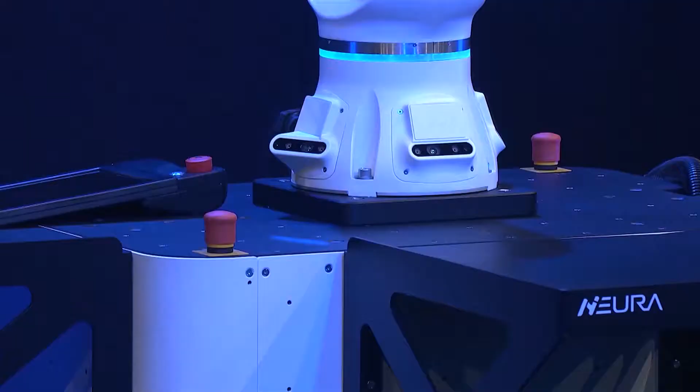That's actually the same as we humans do. So with full speed and full reach, she has 12 kilogram payload. With a little bit less speed, she has 14 kg payload. And the same, you can even give her a little bit more payload, and she will just tell you, hey, my reach changed, I have a little bit less reach.

So let's go to the reach. She has 1.4 meter reach. That's actually excellent, because most of the work in an industrial environment is mostly like emptying gitter boxes. Until now, most cobots are too short for that. MAiRA has the ability because of 7 axes and also having the reach.

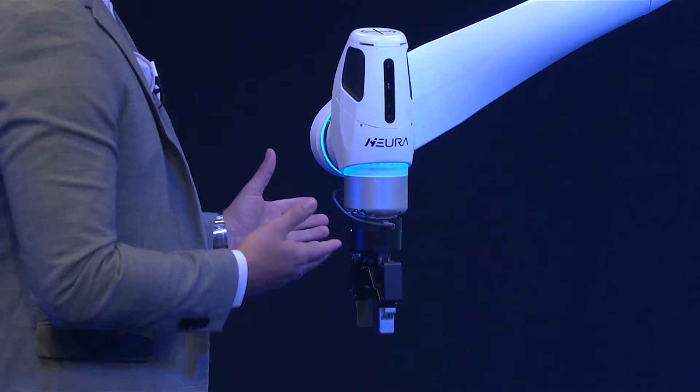So we also have a few different versions. Here you see the medium version MAiRA. We also have a shorter version which has just a reach of 1 meter, but a payload of 18 kilograms. The same, we also have a very long version which is up to 1.6 meters and has just a payload of 10 kg.

Also, one big thing I always hear from customers, from people talking about cobots - mostly they are too slow. This is why we made the robot assistant MAiRA, which is closer to industrial robots. It means it also has the capability to be super fast through the sensors, through the new motor concept we have. So MAiRA has a speed of 4.5 meters per second.

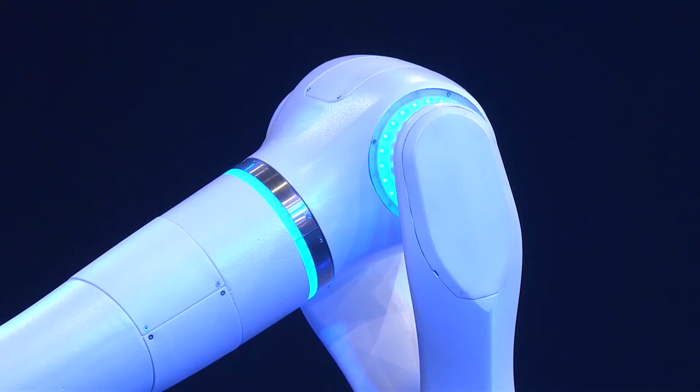So you see a lot of LEDs. It looks beautiful - I would say it would even fit next to your Christmas tree. But this is not why we made all these LEDs inside. The LEDs are there to actually show you the status of every axis on its own. It means if one of these axes turns red or orange, you know something is going to happen soon, or already happened if red.

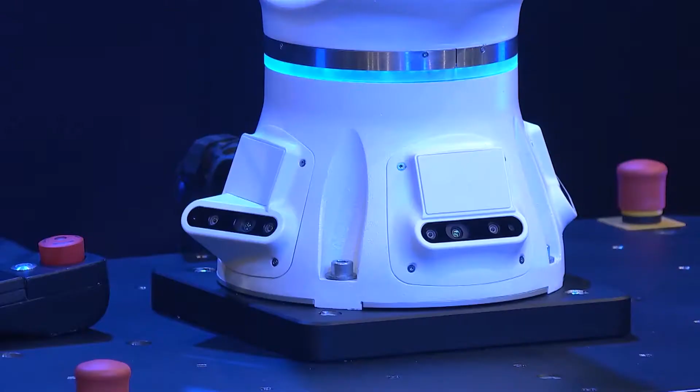Not just the double bearing concept makes our robot super stiff and unique. We also have a honeycomb structure in all these parts, and a very special alloy which all our engineers developed. This makes our robot super stiff, able to be fast and sensitive.

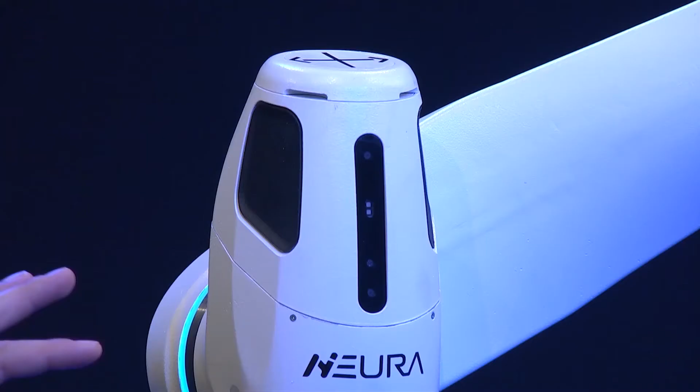I think everybody knows the picture of most cobots, or the videos, or maybe even in real life - there's mostly cables around it. That's because there are mostly grippers which need different IOs or different interfaces on the TCP. With MAiRA, this ends, because from now on all the connectors you need are here on the tool center point. We have GPIOs like Modbus and even IO-Link. We've also thought a little farther, because in the future I hope there are more intelligent grippers coming - this is why we also integrated EtherCAT and CAN bus. Also very special is 3x air. This robot has everything inside that you need for every gripper existing in this world.

So what else is needed to have a robot integrated into your system, or maybe also in your environment? This is the safety of the robot. It's super important - to work side by side with humans, you need safety. To work maybe in a medical field by operating, you need safety. And that's why we have here a very special safety structure.

Every joint on its own has its own safety function, all you need to be safe. Also, we have a safe bus going through the whole robot, which sends all the safe values to our safe master, where we calculate the safe environment, maybe safe Cartesian safety. And we have something which is super unique, I think you've never heard that - we call it the SHD function, the safe human detection. This enables us to have a fast cobot in the environment.

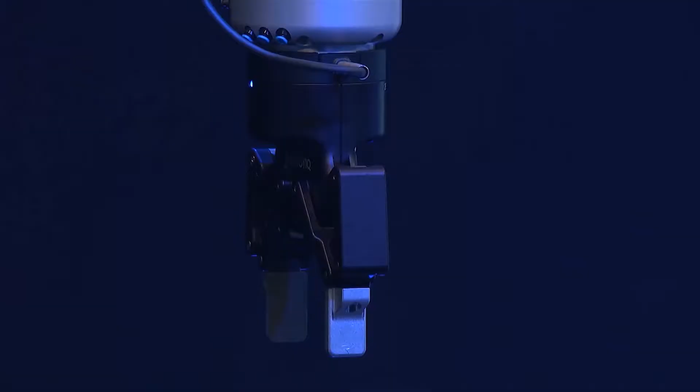So everything you saw here, maybe you don't need a camera - you're able to just leave it out. So it means this MAiRA structure will always be the same. The only modular part is actually the head. So you can just leave the camera away.

So let's come to the best part, actually the fun part, I would say - really starting to interact with a cognitive robot. So here you will see what's the biggest advantage of being cognitive.

So all these senses are there to perceive the environment, but also to interact with you in person. Every person in the world has a different kind of communication, a different way of communicating. The same goes for how every person likes to program this robot, in a different way.

And for that we created 6 different ways, and even more by combining them. First we have teaching by grabbing the robot and just moving it to some position to teach. There's also record functions where you can record complicated movements, or record movements by guiding something.

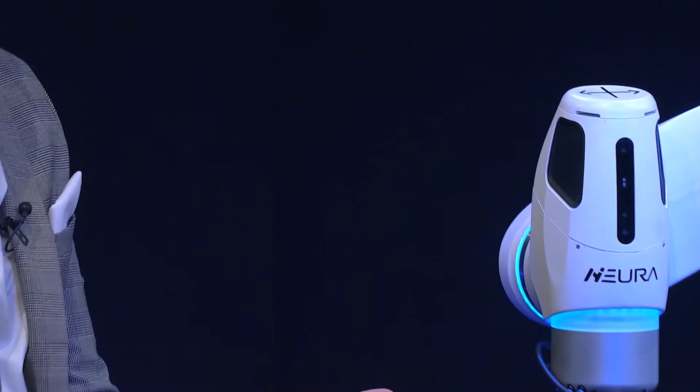So there's also recording of forces by grabbing the robot, moving in some direction, and recording the forces coming from the side here. There's also action recording, meaning everything you're doing gets recorded, and that's great.

But there's also, I think, the most fun part, which is voice. Because we are humans, we like to interact by talking to each other. And that's the same with MAiRA. MAiRA loves when I talk to her.

You will see later. There's also gestures - like the Italians, I think they like this one the most - by showing something, she understands.

And also there is a way, which I think the young guys like maybe, by just a tablet. I mean, even my daughter knows how to program this robot, I'm very sure. I will show you.

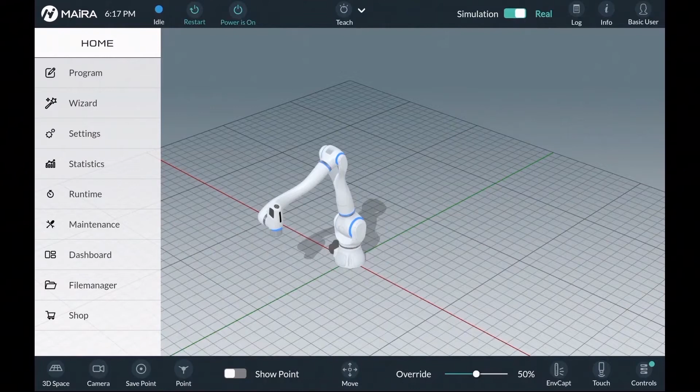This is the tablet with the graphical user interface. So let's just start the robot. Now you see the digital twin of the robot. I hope you see it now.

So here you can just go there and actually touch any axis. From now on you can just move the robot in each direction which you want, or you go over to use other moving functions like zero gravity. So I turn the robot on.

From now on I can actually move the robot wherever I want. Here you can also record these actions, what you want to do. But I don't have much time, so I'll go very fast through all of them.

So how to program over the tree editor. Here you just go grab the gripper you are using, and now you can do everything over drag and drop. You can have any action, just drag it there and start it. But I want to show you some different actions too.

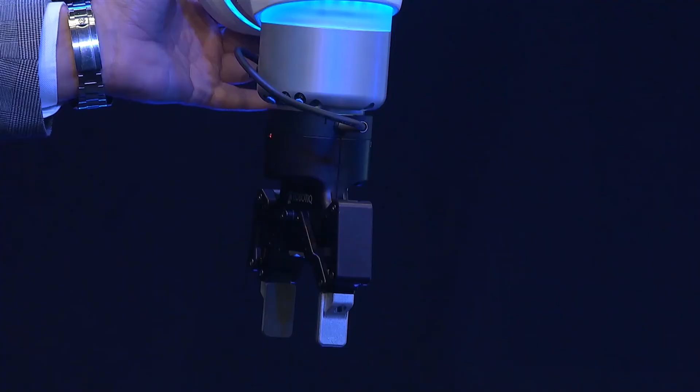One I showed you very shortly is the zero gravity, where you can have the whole robot in zero gravity and move it in any direction you want. But there are also some disadvantages, because this robot still has some rotating axes, so it's very difficult to get linear motion, like along a straight road.

This is why we implemented something we call the skin. It's a 6-DOF touch skin, which I can activate here. From now on, over this touch skin, you can move the whole robot very precisely in any direction, but now linear. So it means you can move in X, Y, Z, and you even have some turning directions. Everything is very simple over this skin, and also very precise.

The other big advantage is that you can divide the forces. With zero gravity, it's very difficult to see where the force is coming from - is it from down there, or from the robot? This is why, to be precise in force recording, we decided to put this sensor inside, having a force torque sensor always integrated at the TCP.

For example, in a grinding application, I think nobody has ever seen something like that. When you're taking the robot, you can actually put in the number of pressure, like forces, and the robot will just apply this kind of force which we want to apply.

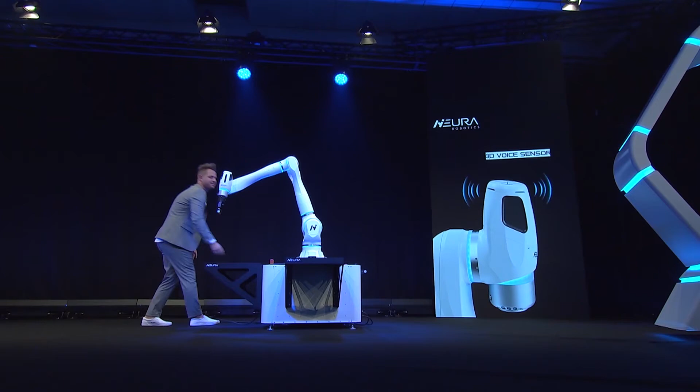Hey MAiRA. Hi David, what can I do for you? How are you first? You know what, I feel shy in front of all these cameras. Me too actually, but I'm getting more and more comfortable. What can I do for you? Please use 'Hey MAiRA' before each command. So now everything I say she hears, so I have to be careful.

Hey MAiRA. Hi, what can I do? Free drive mode. Do you mean free drive mode? Yes. I'm in free drive mode now. So now you can take the whole robot and move it in any direction.

And stop. You can also give her other commands, like: Hey MAiRA. Hi, what can I do? Move joint. Do you mean move joint? Yes. Move joint to which point? 28. Do you mean 28? Yes. Move joint to point 28. Here you see, you can command her with everything.

And that's amazing, that's something I love the most. You can even turn some axes if you want. You can do many things, and this is just like how we're used to communicating with humans, and that's also how you can communicate with our robot.

Like I told you, we can program the whole robot by voice. So when I say, hey MAiRA - hi, what can I do? - Record actions. Do you mean record actions? Yes. I am in free drive mode and recording your actions now.

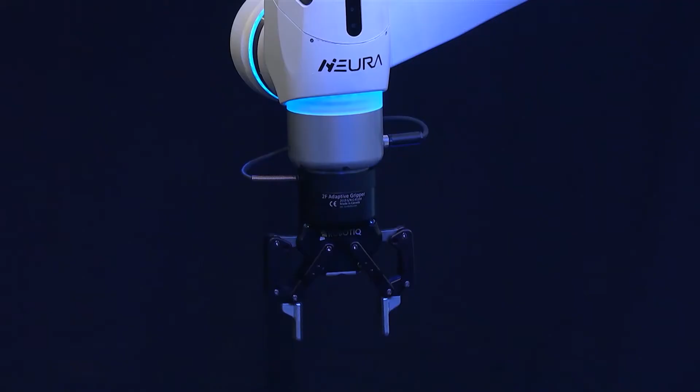So now you see exactly what I was moving, and she just recorded everything. Even now you will see she will open and close the grippers like I did. That's actually the new way of programming. This is an interaction of different kinds of disciplines.

One is by hand guiding, one is by voice, and the other is even over the safety touch skin. So now we will come to the other part, which is also fun - this is the vision part. Most of you know that there are cobots, and you just integrate a vision system somewhere on some corner or whatever. The very big difficulty is actually to integrate them, to make them cooperate together. This issue you will not have with MAiRA, because MAiRA has all the vision sensors and everything inside the robot.

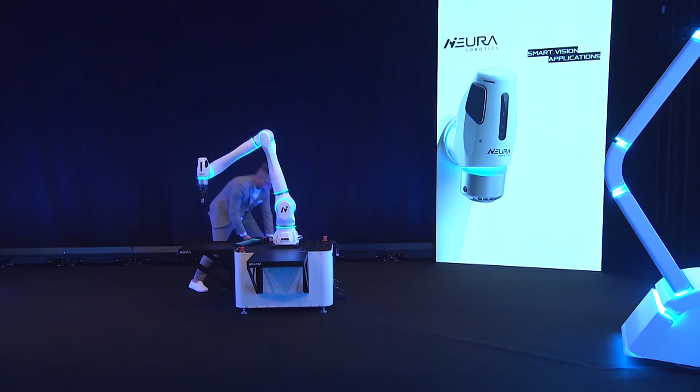Here you see the camera, and I will show you some examples. So now I place some parts here. There are many different kinds of vision applications you can do - object detection, identification, and also pose estimation to know where it is and how to grasp it. Smart grasping and smart assembling tasks are possible with this vision.

In this case, what I would like to show you is that we also have machine learning algorithms running on our system. We have integrated GPU and CPU, which is very strong, to make machine learning directly on the robot.

I start with a simple task which I call program scan. Here I just run the whole thing to show you how easy it is to scan the environment and then learn out of it.

So now you will see the robot is going to move. This movement, he captures everything he sees, and you will see it also in the GUI. I hope you also see the GUI at this time right now.

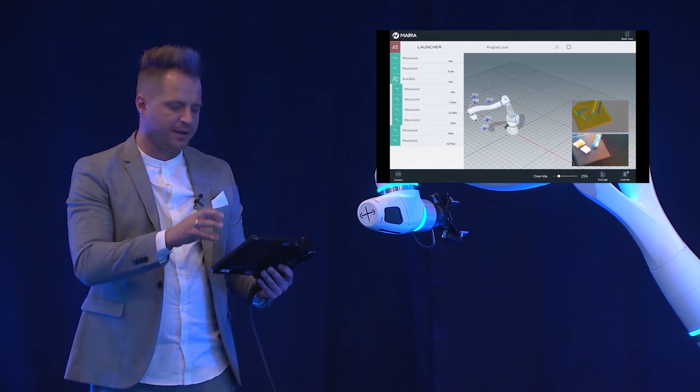Here you see, on one hand, the point cloud, which is the depth information the robot gets, and also for the later learning process. And you see the 2D images saved as well, because we have two kinds - one is 2D color images, and the other is point cloud.

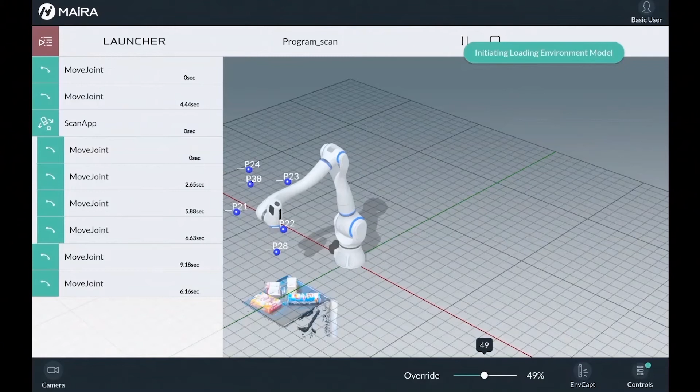So now we are loading and processing the whole part. It will take some time, but then we are able to learn out of it. At this time he goes into a different position, and afterward you will see that you get this - what we saw in the real environment translated to the virtual environment. So here on the GUI you now see this environment, these components, also in our virtual environment.

So now we could disconnect this tablet and make simulations in the virtual environment. So now we saw one thing, but I'll show you something even cooler - we call it pick objects, which we learned.

So right now we have two different kinds of picking objects. One is unknown parts - I can put any parts on this table, and MAiRA will actually take every part away that's there. It will always find a way to do it. But there's also another method - selective grasping. That's what I'm now turning on.

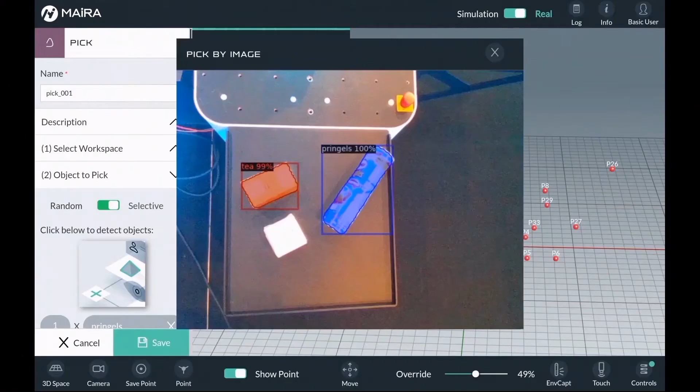Now you see she actually recognized two of the parts she learned before. So it means right now I can click on one of them - I like chips right now. And in this moment you can also choose how many of these components you need. Can you imagine, for industrial use, you have many kinds of components in a box - you first put them there, learn them quickly, and then grab them out of the box.

Or also, like the future of any supermarket - we're all having a smartphone, we have an app where we just type in what kind of components, or food, or groceries we want. And in this moment, MAiRA is going through the store by vision and picking all these groceries and putting them in a basket. So you don't waste time - you're just going and grabbing the whole basket for you.

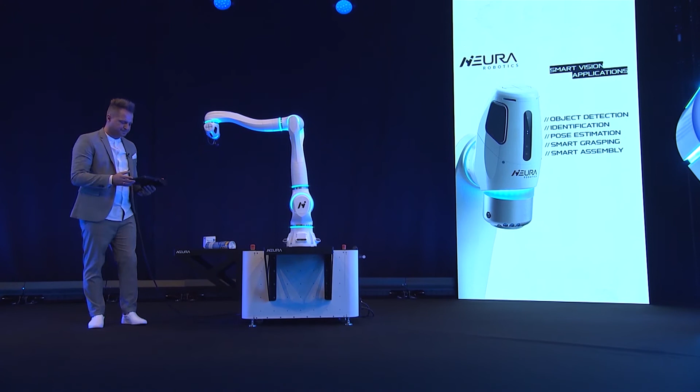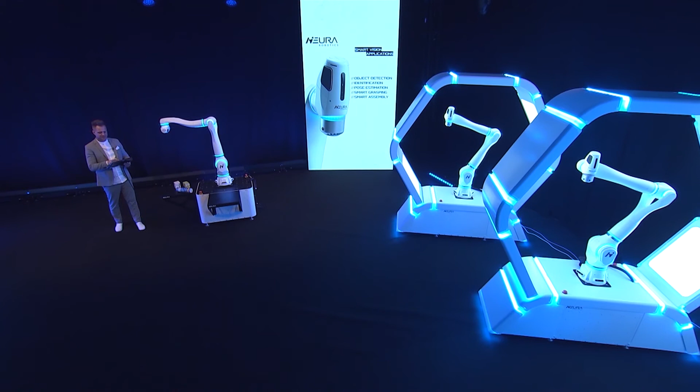So one of the other cool parts is grasping objects - known or unknown, it doesn't matter. For that, we have the picking function. When I run the picking function, she will check the place of all objects and decide on one of them. She's able to pick any kind of object, as long as they fit inside the gripper.

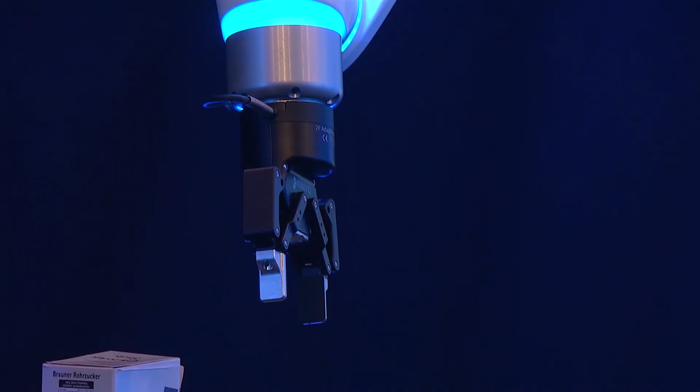So at this moment, she chooses the Pringles, what I would actually call chips. But I think she decided for the Pringles. Yes, awesome - so now she takes the Pringles and brings it to the other side. So I just thought.

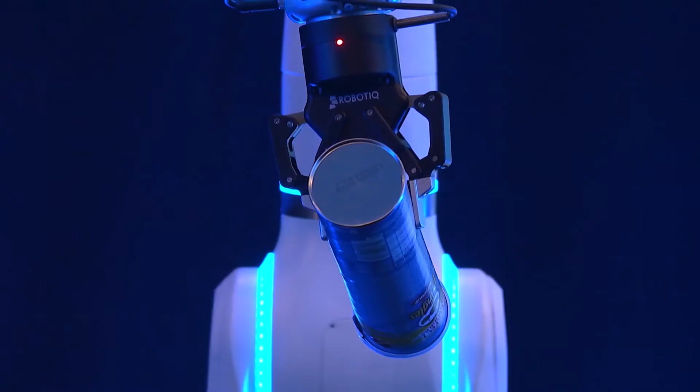So that is actually one of the functions you saw before. You can have a pick function, you can also have unknown function. Can you imagine this for your environment until now?

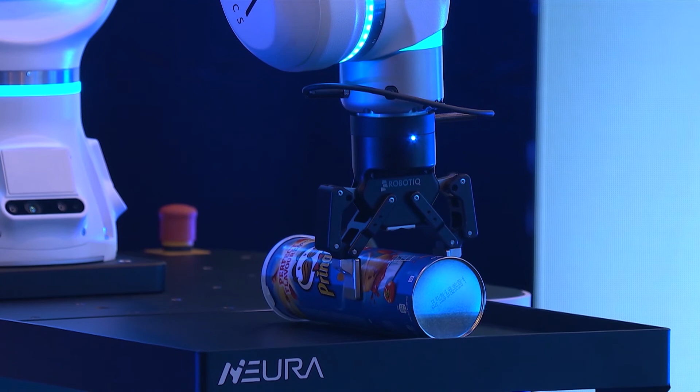Until today, most applications use additional cameras, and that additional camera actually has to be connected to your robot. The environment is so important. The robot itself does not need any other parts, QR codes or anything like that to know the environment. It will just calculate the whole environment by its own camera and how the camera is calibrated.

And for that we have also extra tools. So I just stopped because she will now start to pick any of these objects. There are also some other features with the camera. One is the scanning environment, another is actually knowing, like picking parts which you don't know. But there's also some others, like gesture.

And therefore we have one camera there on the front, but we also have implemented 3 different cameras. So at this point, when I push my fingers together, point recorded - it will save the point. And the same with many other actions.

But because of time, I'm just going to go right into one of my favorite features. I had a lot, I know, but they're all the best features you can find. So I'm just choosing one of the programs because I have to put the point inside. So now when I play it, it has to actually start.

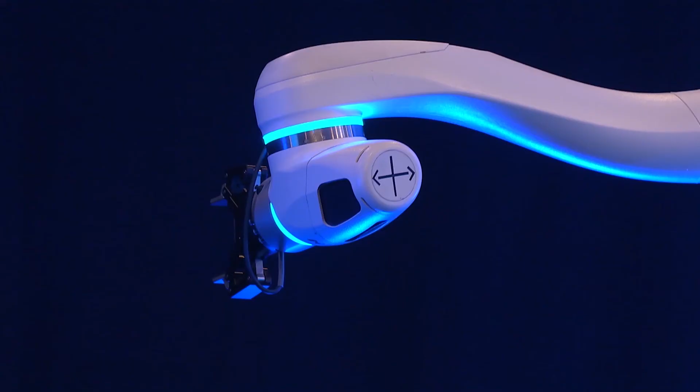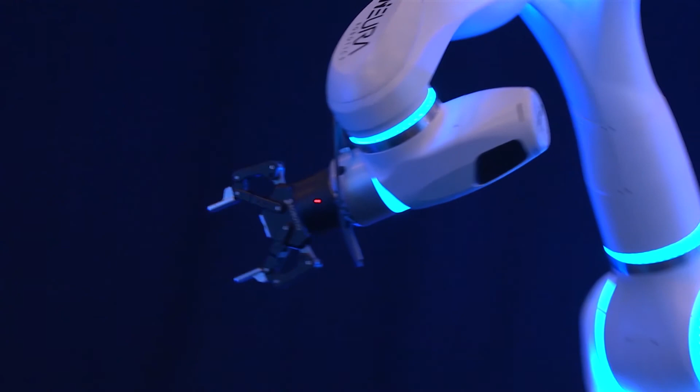You see the robot is working. I'll go some steps away because then you will see how the robot gets always faster and faster. This is one of the coolest features you can find. This is actually the feature which makes the robot fully collaborative.

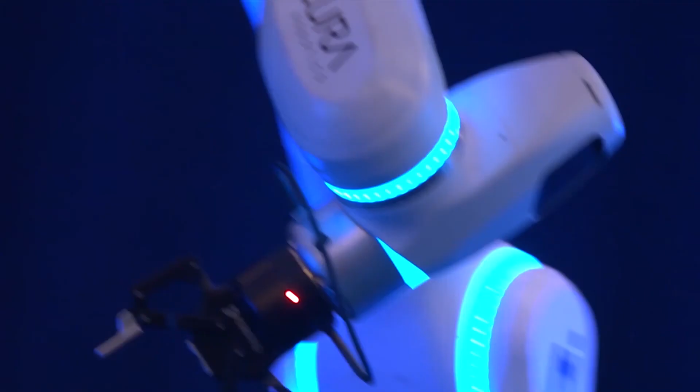Something which will not collide with humans, something which will not hurt you. And a cool thing you will see here: when I go closer, it goes away. But now, if I go a little bit away, it will go again and start going faster and faster.

I tried going a little bit faster, like now - it will not. It will stop again, but it goes as close as possible. So even here, it goes as close as possible, but it will normally not touch me at all, because we even have a gripper inside the system.

I go again a step away, it goes faster again. But now look - because this is a route which is always safe. So it means it does not depend on what you have in your gripper, it does not depend on what you're handling.

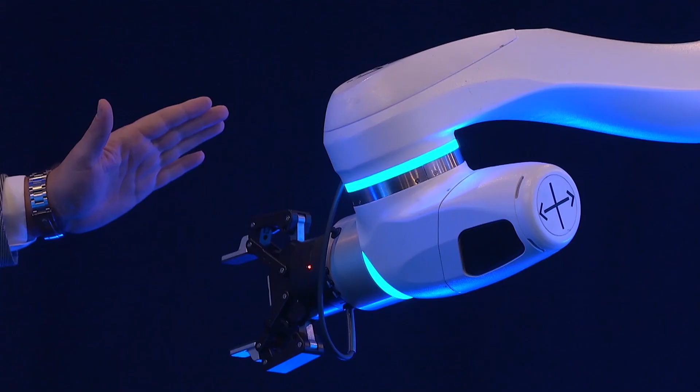It depends just on - as soon as you come closer, the distance of each body part of AURA is actually important to the distance to the human. It will also not function if I threw something else inside, because we also know the function like with the scanners. The scanners will detect anything that is moving, but AURA detects just humans, and that's so special.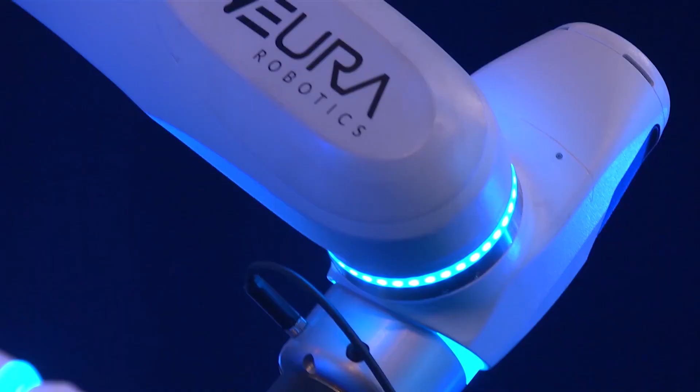Yes, also I forgot to mention in the beginning, these cameras which you see here are not depending on the function which I showed you right now. But they are actually able to also check what kind of objects you have on the TCP. So it means we can have the first fully integrated machine, because until now robots are not complete machines, and that's actually a disadvantage - that's why you need so much time for all the certification processes.

So like you see here, it will not move at all because it knows that I'm there, and from any angle you approach, it will always see that you're there.

So now you've seen a lot of functions. Why did we do it? Actually, to invite you first to come here to meet this amazing product, and also to get some new partners maybe who are outside, who want to cooperate with this amazing product, which we call MAiRA.

So there's one more thing I really need to tell you before I have to go. This sensor which you have now seen, the safe human detection sensor, will be in all our systems. So it means every one of our robots will be in the future one of your personal assistants, and is always safe, even without touching you.